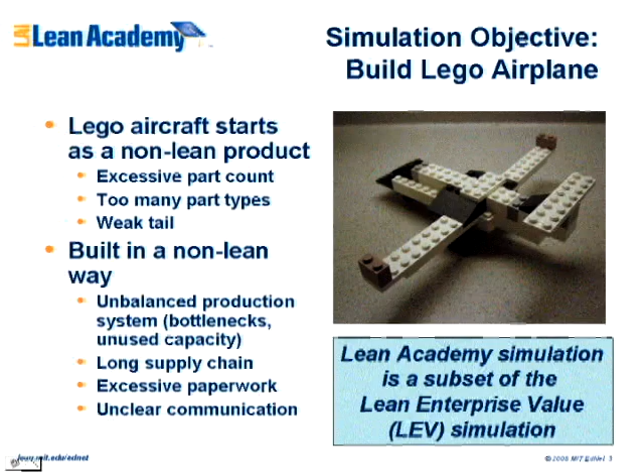The simulation is built around attempting to build Lego airplanes that are actually relatively poorly designed Lego airplanes. If the criteria for a Lego airplane is that it's relatively easy to put together and it stays together once you put it there, this is not a very good airplane. And it's built in a very unlean way.

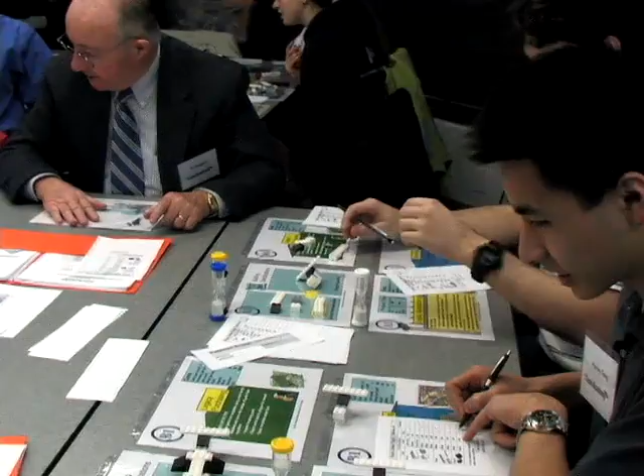It's built in a legacy system which has an unbalanced production system with bottlenecks and other problems, a long supply chain, an uncoordinated supply chain. The Legos actually come from someplace else, and they have to be transported to the table where the airplanes are built. And there's a lot of paperwork and communications issues in both getting the plane built and then at the end of each round doing the accounting necessary to figure out whether you actually made money or not from the airplane.

The system used in the Lean Academy is moderately simple. We have 4 manufacturing plants that build tails, fuselages, wings, and final assemblies to deliver an airplane to the customer. We have a supplier quality representative who interacts with a supply chain consisting of a single dedicated supplier, but in a different place, at a table where the suppliers sit. So there's a flow of information between these people, and hopefully that creates a flow of parts, of subassemblies and parts that result in some value being delivered, an aircraft being delivered to the customer.

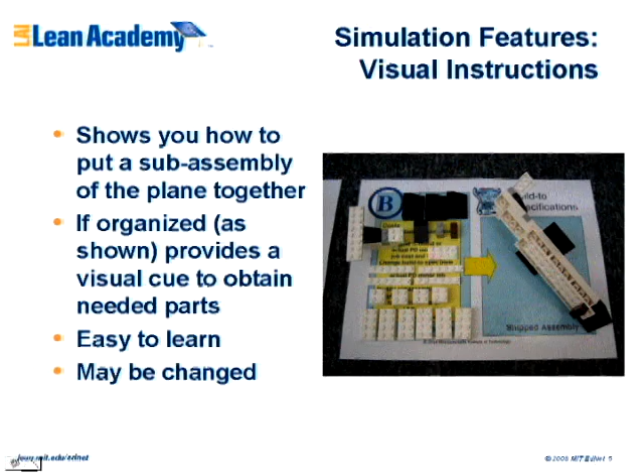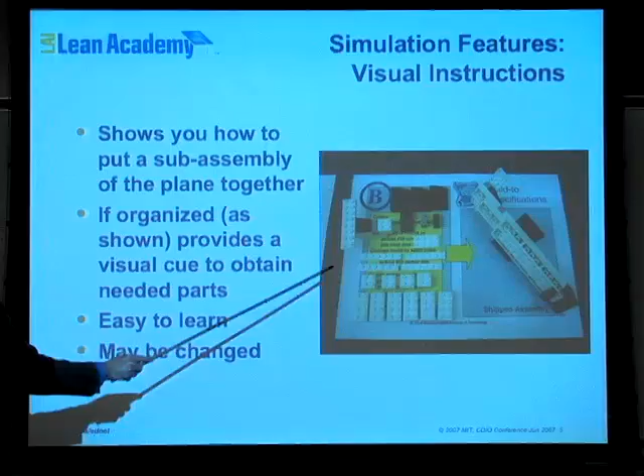The simulation, it's not just a matter of building Lego airplanes. It's actually a fairly rigidly defined simulation that has a number of features. For one thing, what each student is allowed to do is represented visually like this. Each student is told, take these pieces and build that assembly. This both defines what they need to do visually, so it's fairly easy to understand, and it's changeable, very important. This is a rather difficult assembly to put together. If the students wish to change it, they can in an organized way.

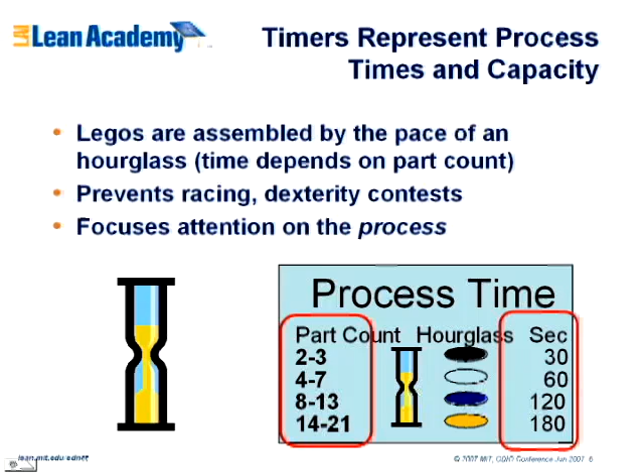The processes that they do are also constrained by hourglasses. It's not a dexterity contest. It's not a race. It's a process, and this process is at many steps constrained by the pace of some hourglasses. In particular, the assembly operations, depending on the part count, hourglasses with different times are used to represent the actual factory operations that are simulated by the simulation. It's not just a matter of the student's dexterity. And so this becomes a constraint that the students have to work with and design solutions around.

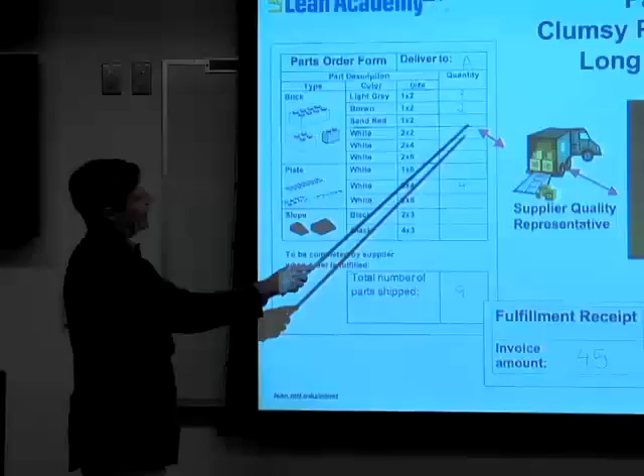There's a fairly long paperwork chain, and it's fairly clumsy. It's not that hard to learn, but it turns out it's not that easy to use. Standard paper order form here, you could think of that even as a web form in the modern economy, but you're just saying, I want this many of this part, handing it off to your supplier quality representative, who then hands it to the supplier, who has to fill it, and then they have to fill out essentially an invoice sheet that they send back to you.

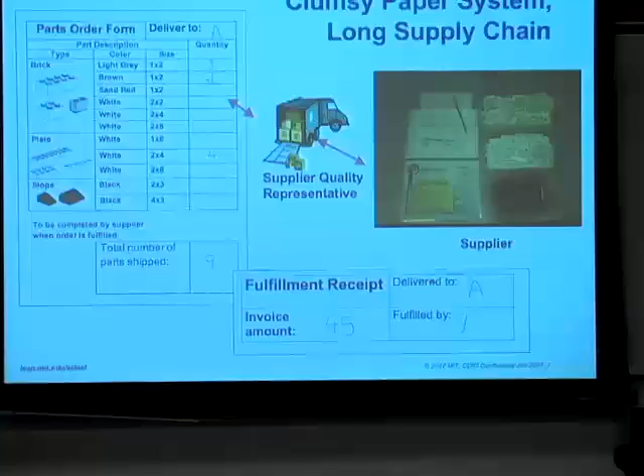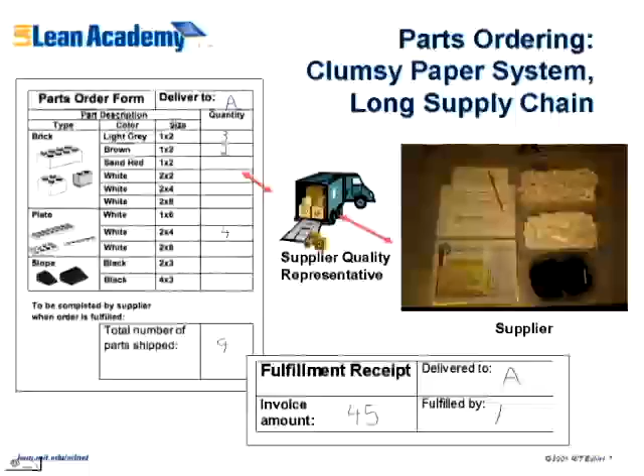That means that every transaction with Legos involves 2 pieces of paper and 1, 2, 3, 4 steps just to get your parts to build. Not a very good system, but not atypical of the real world. And finally, there's an accounting system for Lean Academy.

It's a cash flow system that tracks all of the costs involved. The fixed costs: how much does it cost to keep your plants open? The variable costs: how much do those parts cost? How much does it cost to do various things? And you can figure out whether you're making money or not. Often you're not. If you don't get out enough airplanes, you don't make any money. Or if you do things in a wasteful way, if you waste parts, you won't make any money.

All right, everybody, let's check in. I'd like to find out how many planes each table built. Let's start here. 1 plane. 1 plane. 2 planes. 1 plane. All right. Who's making money?

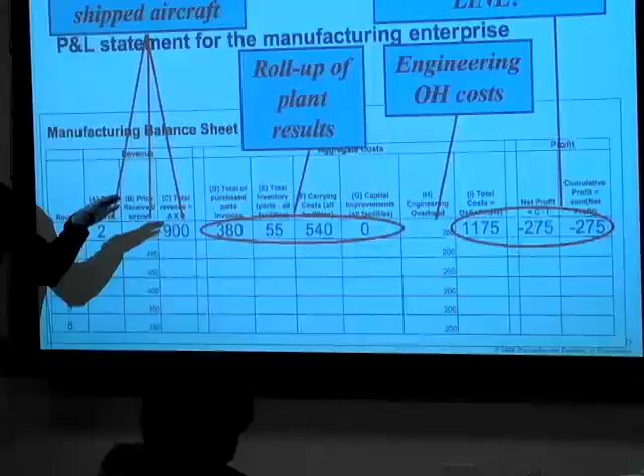Let me ask a question. Is anybody's manufacturing operations making money yet? No. Okay. Tell me how much money the supplier is making who is profitable. 14. Okay, so you're sort of barely profitable. That's better than being negative. All right. So the supplier might be doing well in that enterprise, but it might be at the expense of the manufacturing portion. So this is something that you're going to think about as you go through your simulation.

So in the Lean Academy, we dedicate 1 day to the simulation, about 2/3 of the teaching time in that day. There's some lectures interspersed. It happens in 12-minute active rounds. There's 12 minutes of frenzy, followed by and preceded by, in many cases, time for reflection, planning, financial analysis, and so forth. And these are separated up into basically learning how to do the simulation, getting past the learning curve, understanding how lean process improvements can be used to take a legacy state and make it lean and make it work better.

And then a final round where the manufacturing suppliers and also a not simulated but conceptual engineering process is used to achieve enterprise lean by redesigning the airplane, tuning the supply chain to a really high state, and seeing what you can do in an almost ideal state.

This is a common tool around the industry to go and look at other facilities and benchmark yourselves, not only with respect to companies that do the same thing as you do, but also to benchmark yourself against companies that do other things but have similar processes to you. So there's a lot to learn by going and walking around and seeing this. And from what I took away from the tables, I think we've got 2 different build-to philosophies going on. So you'll notice there are 2 kinds of build-to packages going on. So take a look at that and see what caused somebody else to think differently than what you did.

They can tear down or move facilities, again, based on lean principles, not just random action. And they can modernize this archaic order system, again, planned using lean principles, and there's a mechanic in the simulation to allow a paperless, there's actually still a little bit of paper, but much less, ordering system that would simulate a modern web-based, perhaps, or certainly electronics-based inventory management system.

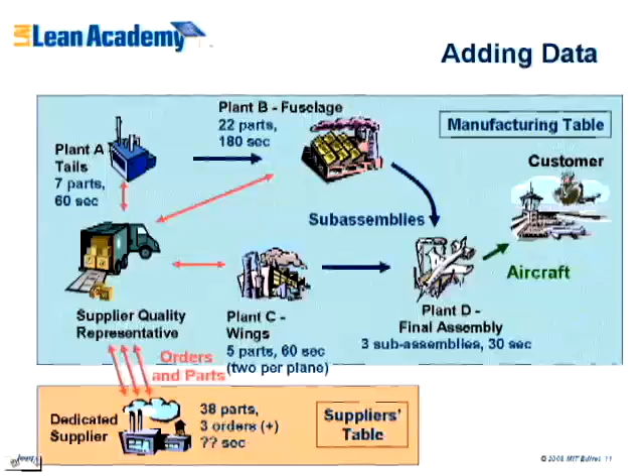One of the key features the simulation allows us is to use data. It's very difficult to go out to a real aircraft manufacturing plant and play with it. With the simulation, we can play with it in these 12-minute rounds and create and use data that we've collected to both plan improvements and track processes. So we can keep track of how long does it take to do things, how many parts are involved, what's the delay involved in ordering parts, etc.

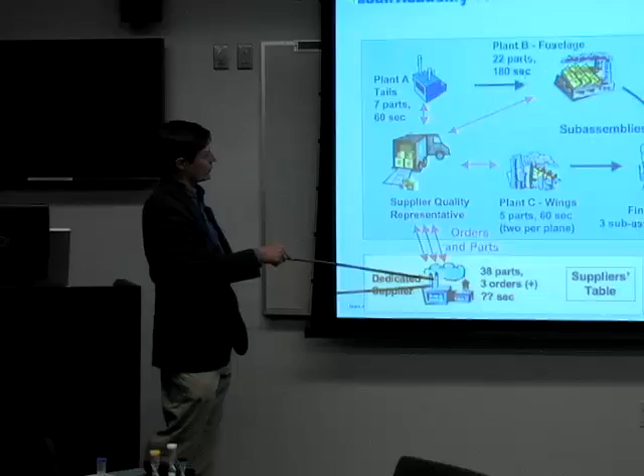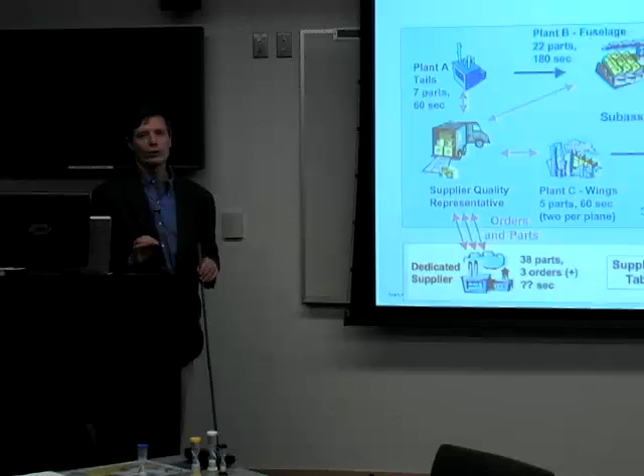And we can do that quantitatively, and that's one of the key aspects of most process improvement techniques, is to use the data and let it tell you what to do, not just kind of make things up as you go along, be entirely dependent on common sense or experience to do these kinds of improvements.

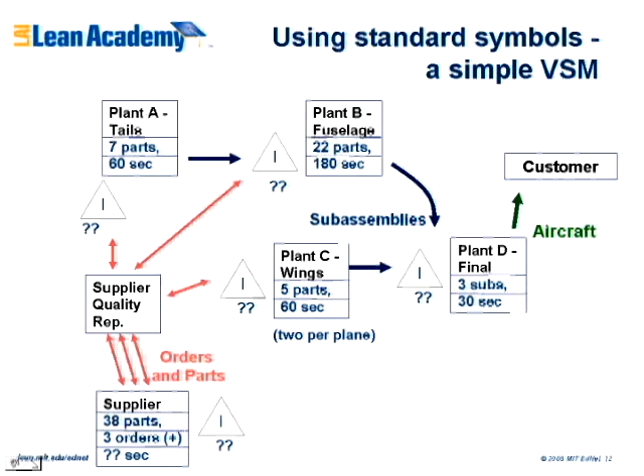And this data can be incorporated into classic lean tools like value stream mappings. This is the same data plotted in a classic lean value stream map. Again, it gives them the opportunity to touch a tool, to actually use it, to actually fill out the data with data that they've collected from at least a simulated reality, and then use that to analyze it. So they can find bottlenecks, they can find non-value added steps, they can find places where paperwork and lack of synchronization are slowing the process down, and then focus their improvements on those areas.

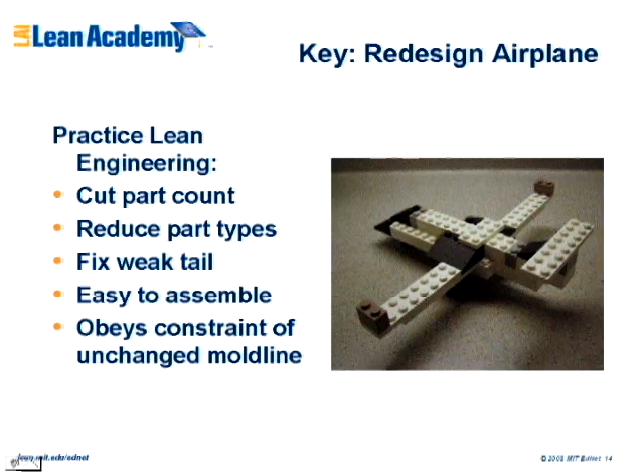Finally, at the end of the simulation, we essentially, as we do in the real world with lean thinking, ask them to expand their horizon, expand the boundaries of the enterprise that they're considering, and see if they can get bigger payoffs by doing more, by bringing in more functions. In this case, there's not an engineering function in this simulation, but we do allow them to redesign the airplane to cut part count, reduce part types, fix problems with the airplane, make it easier to assemble, do all of the engineering functions that facilitate lean in the real world. And again, touch it, understand it in context, and then see how it works in the final round.

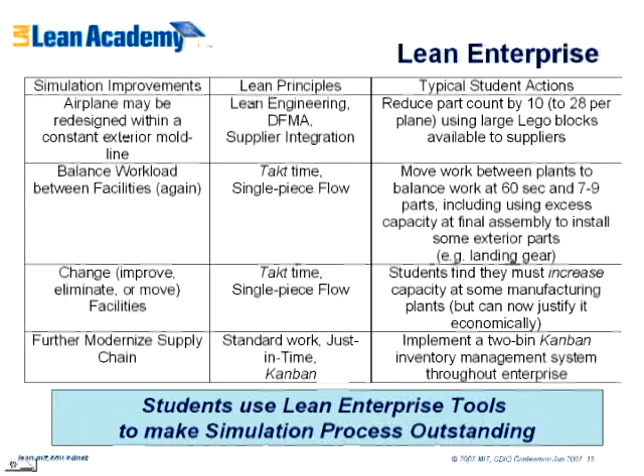And again, by rebalancing work, by redesigning the airplane, by changing the facility organization and further modernizing the supply chain, getting it into a really clean, modern, just-in-time supply chain, using the lean principles and implementing it on the simulation, they can get an outstanding process out of it. And that gives them a real intuitive and tactile feel for how lean-type product improvement principles can be used to not just make a process better, but to make it astonishingly better in a way that they usually do not think is possible when they start the simulation.

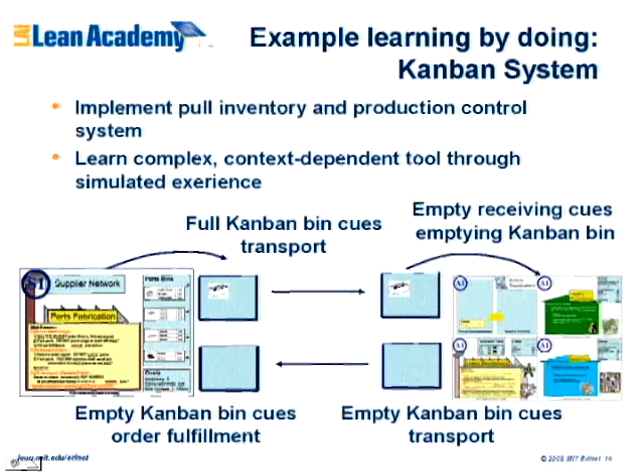Another thing that's done is throughout the simulation we embed learning by doing sort of mini lessons. And this is just a single example. Kanban systems. Kanbans are an inventory management, ordering, and transport system which is difficult to lecture to because it's a very simple thing that has a lot of different functionalities in the real world and solves a lot of problems in ways that are sometimes non-intuitive.

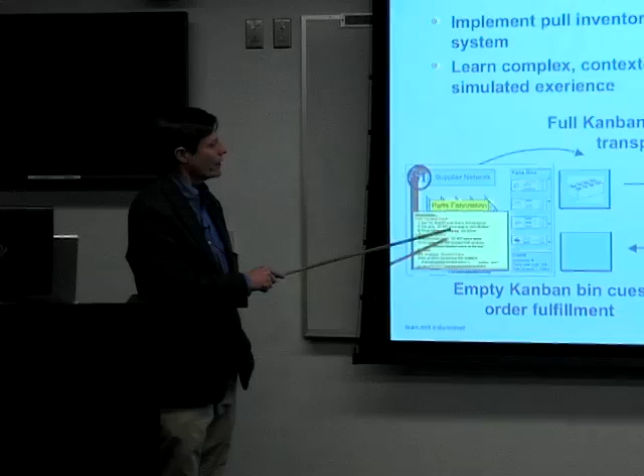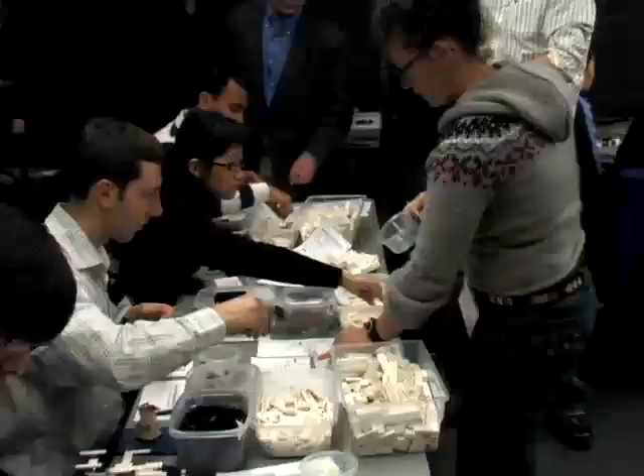In the simulation, they use Kanbans to basically solve their inventory management and supply chain problems, and they get both repeated reintroduction to the concept and what they're doing, and mentored execution of that concept in the simulated world, so that they really do get an understanding of how a simple system like Kanban can serve so many functions and solve so many problems.

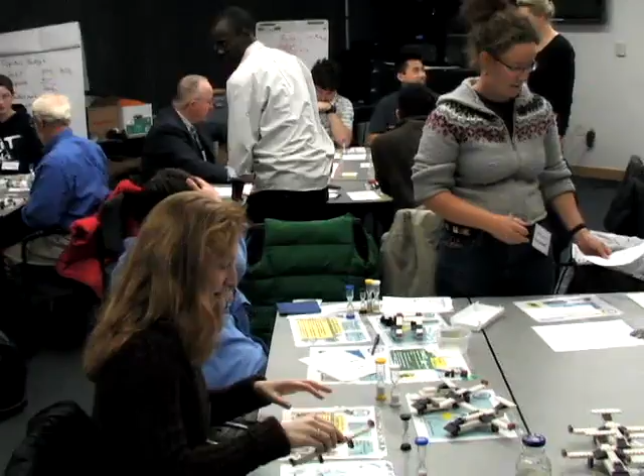Okay, so we had a successful conclusion of our simulation exercise. All of our tables managed to produce at least 8 aircraft. One table got all the way up to the 12 that the customer really wanted, and we had an 11 and a 10. Everybody got there by a somewhat different route, and we learned some lessons along the way.

Our group that produced 8, now that was still better than the theoretical maximum 6 they were making before. But they didn't meet the theoretical capacity of 12 because they still hadn't ironed out issues with their supply chain and with coordinating. It wasn't that they didn't have the theoretical capacity. It was that the coordination of the different components of their enterprise wasn't completely ironed out yet. So they didn't meet their production goals.

Very interesting, the group that made 11 airplanes did get everything coordinated. They did a very good job. One order was one piece short. And in a lean system, you're very vulnerable to that kind of disruption. That one piece in that one order cost them an airplane because it disrupted their synchronization. It took them a minute to recover. That was an airplane. Still, that is a known issue with lean production systems, not necessarily a bad thing.

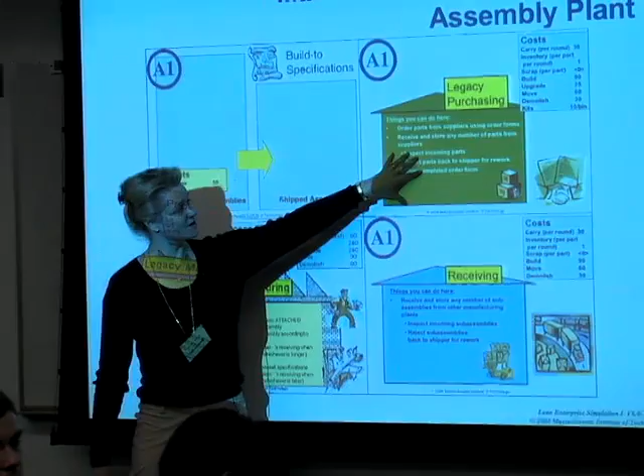We also have had very positive experience with basically teaching complicated systems. Most of the previous literature evidence was on relatively simple things, fact-based things. We're actually trying to teach a system that affects other systems. So it's a complicated body of knowledge, body of understanding that the students are expected to absorb in a relatively short time. And most of these kind of systems are not available for manipulation for teaching purposes. You can't go play with an airplane factory. We found that the students have a good experience, and this experience is not limited to this particular simulation, although this is a good exemplar of it.

If the simulation is complex enough to capture the key features, including the emergent behaviors of the system. If it's too simple, you're not really changing a system that has unexpected behaviors, so you're not going to capture this kind of learning. On the other hand, it has to be simple enough to have an acceptable learning curve. If it takes 3 days to learn, it's not going to be a teaching tool. And of course, it has to be fast enough that you can do multiple cycles of learning within the teaching period. It also has to be credible in the sense that it can't have artifacts that the students say, well, this is not realistic, and therefore I will dismiss the experience because I don't believe it. And it has to be fun to keep people engaged.

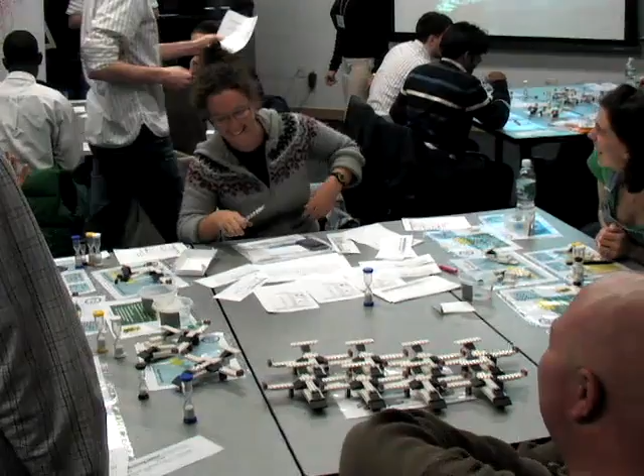Just qualitatively, we also get some written feedback and verbal feedback, and again, this is unprompted. We ask them the general question, what do you like about the course and what don't you like? And what we find is what they like is what we're hoping, which is that it increases the comprehension of the curriculum, that the hands-on learning and practice field experiences are valuable to them, and that it increases their involvement and excitement with the material. As well as, and this was not explicit, but it does show up a lot in the student responses, as a team building and camaraderie building activity. It's also very effective.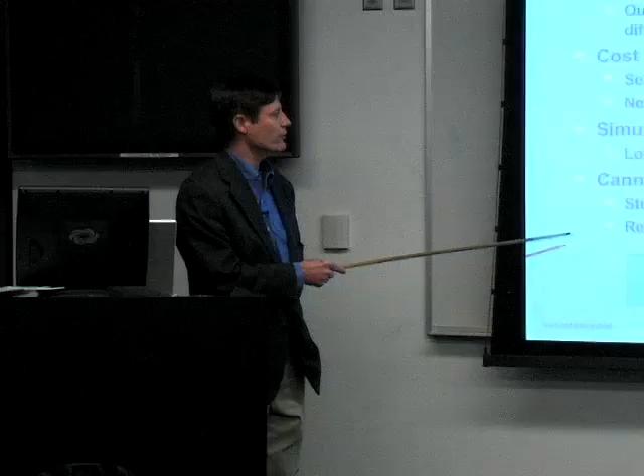Our simulation seems to be fairly robust, but in general, simulations are vulnerable to disruption, and you can't satisfy every learning style. Amusingly, we've had written feedback asking for both more and less simulation, because some people feel they need more time to internalize the information that's there. Others get it quickly and wish they could move on to other learning modes.

And another one, and it's an unexpected psychological effect, is that there's real stress in the simulated process, and that this sometimes creates difficulties with people's learning, can create competition and bad feeling if it's not managed carefully. We've learned that that's something that is an issue that needs to be managed. And these, by the way, are typical issues for teaching simulations.

Okay, in conclusion to this part, we have a unique simulation of aerospace enterprises. A subset of it is used in the Lean Academy. We think it works. And it provides a laboratory for experiential learning of complex systems. There's not a whole lot of work in this area going on. We've had a very good experience with it. Certainly the feedback that we have from our students indicates that it's successful. And the caveats that we have for our simulation are typical of learning simulations in general.

There are other aspects of the simulation that replicate the entire enterprise, and I'm going to talk a little bit about each of those elements. And the simulations are modular, so you can go through the manufacturing part, or you can go through the engineering part, depending on what the learning objectives for the course are. You can combine them in various ways. You can combine the manufacturing with the engineering to teach specific lessons about transition to production and engineering support. You can look at just engineering alone if you are interested in understanding how engineering processes behave in a highly variable environment. So there's a lot of flexibility that's built into the simulation environment.

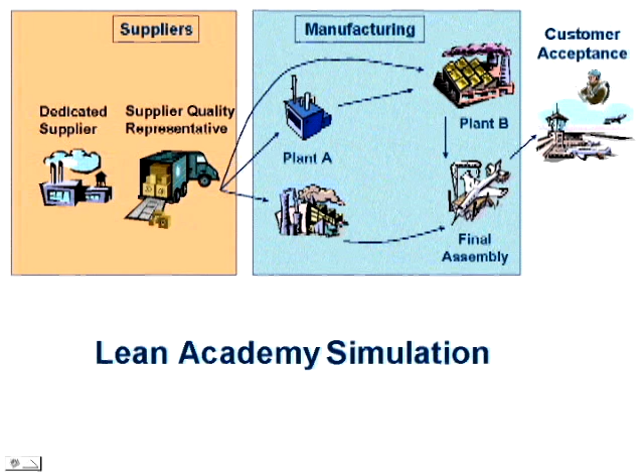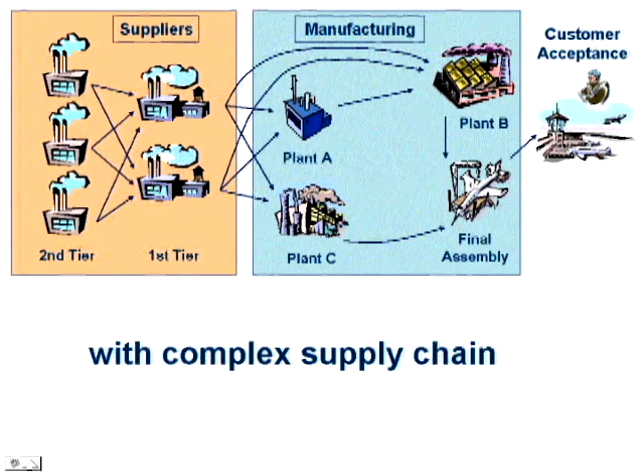So this is the simulation that you all experienced here in the Lean Academy that has the manufacturing core simulation and a simplified supplier base with a representative. If you expand out to the full supplier simulation, you get a much richer experience of understanding how ordering and fulfillment processes are dynamic in the enterprise, and learning much more about network organization structures and the way they behave, and how effective coordination is critical to Lean.

For the full enterprise, you can add the dynamics of an engineering system that is supporting the manufacturing and supply base. And this is the full LEV sim, where the engineering changes that you made during the course of the redesign of the airplane were done for essentially free in this simulation that you did in the Lean Academy. In the real enterprise simulation, you have to wait for the engineers to process those jobs, and that can lead to all sorts of interesting dynamics amongst the players and simulated organizational structures.

There's also a service and support module that looks at aftermarket field support for the products, and this introduces new and interesting complexities to the enterprise, because you now have two main value streams and sources of revenues. You have to prioritize where you make improvements in the enterprise.

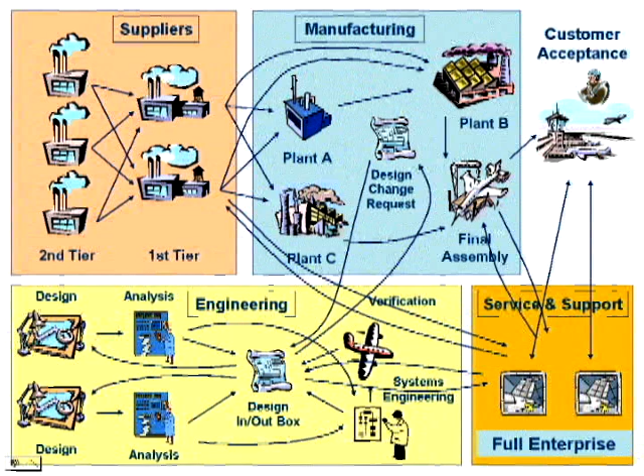All right, so there's another variant of the simulation that focuses on just an engineering organization. Most engineering organizations have multiple projects going on at a given time, and they're competing for resources, and those projects aren't always the same. So this simulation looks at how you prioritize projects, how you structure the organization, how you manage the interactions so that you get the highest throughput through the system and the most return on investment for improvements through Lean practices.

So some of the things that were not covered in the Lean Academy simulation are a more advanced economic system that allows you to make trade-offs, to understand what the impact of Lean improvements are, and to actually calculate financial performance of the kind that you would typically track with a real company. There's also a Lean calculator that can be used to evaluate whether one proposed improvement effort is better than another. And these are levels of analysis that are more in-depth, tools that are more sophisticated that can be added on to the sim environment. So in all, it's a fairly sophisticated system for teaching the impact of Lean principles and practices on an enterprise.

So there are a number of organizations that are using the LEV simulation and its variants, and they have adopted it for their own use and are actually using it in their own internal training. So we have a method for actually disseminating these materials, and if there are any questions about adopting the simulation, the best place to go would be to send a message to ednet@mit.edu, and you can get more information about how you might adopt these training materials.